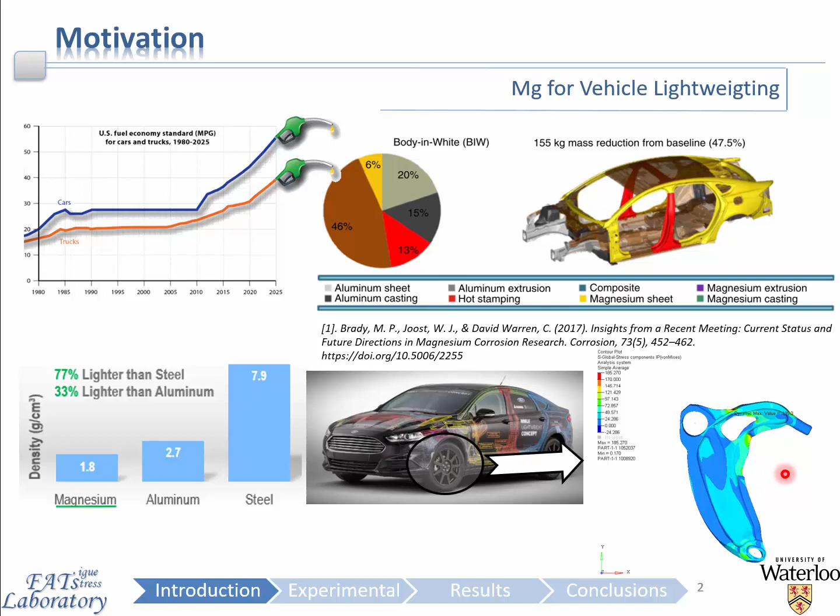So one might ask themselves, if the properties of forged magnesium are arguably superior, why hasn't this material been utilized for such components already? The answer has many facets, one of which is the poor formability of magnesium at room temperature.

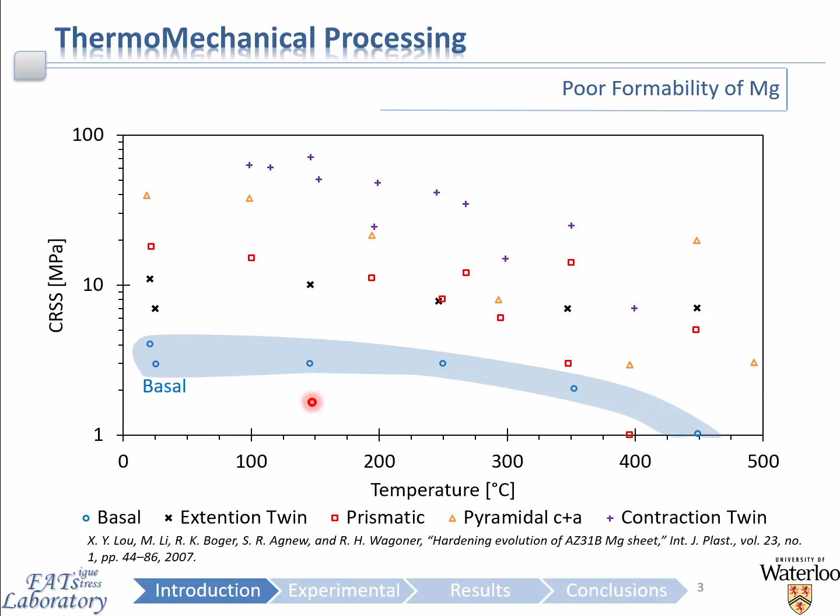If the grain orientation is not favorable to activate basal slip, then extension twinning will be active, in the range of 7 to 10 megapascals, followed by prismatic, pyramidal, and contraction twinning.

Von Mises' criterion states that for arbitrary plastic deformation, at least 5 independent slip systems need to be activated. At room temperature, this is very difficult with magnesium, as basal slip is typically what dominates.

However, at elevated temperatures in the range of 225 to 425 degrees Celsius, the critical resolved shear stress of the other modes decreases dramatically, improving the ability to plastically deform and thus the formability of the material. So to successfully process magnesium and achieve large strain via forging, it must be done at this elevated temperature regime.

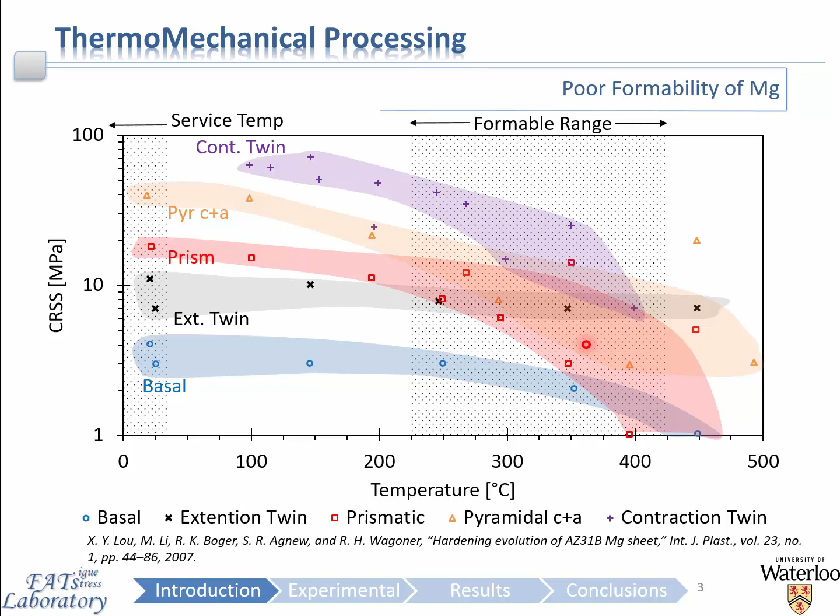This introduction of temperature into the processing equation complicates controlling the resulting microstructure quite a bit, as well as the fatigue behavior, as the process is now highly thermomechanical.

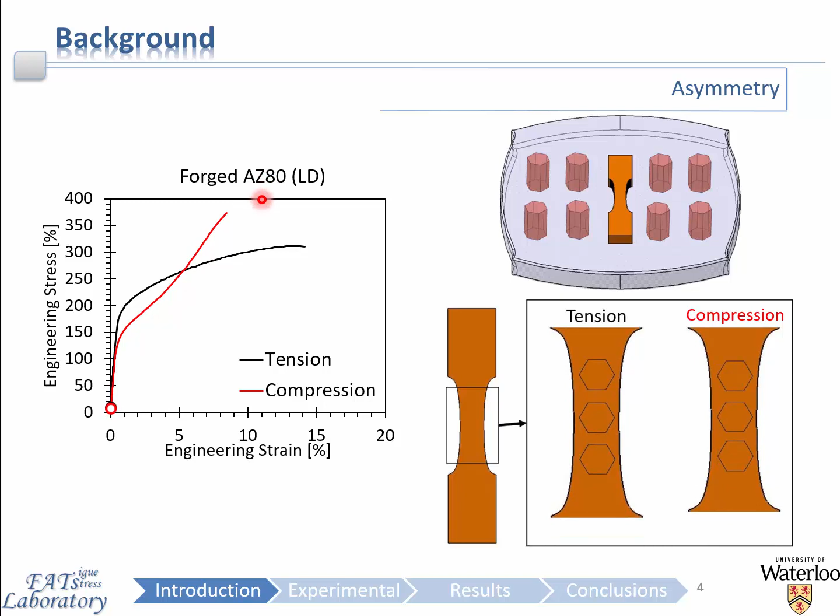Anisotropy is also another well-known phenomenon which is present in most wrought forms of magnesium alloy with sharp texture. In essence, it describes the dependence of the material properties on the direction relative to the crystallographic axes.

So important to note here is that the material behaves vastly different in monotonic tension depending on the direction which you are deforming it. So this anisotropic nature of magnesium will subsequently be discussed in more detail.

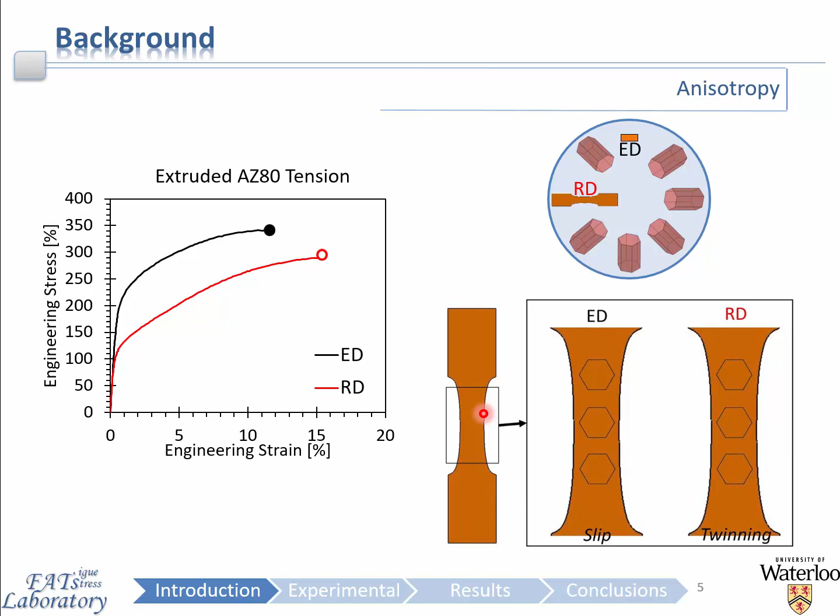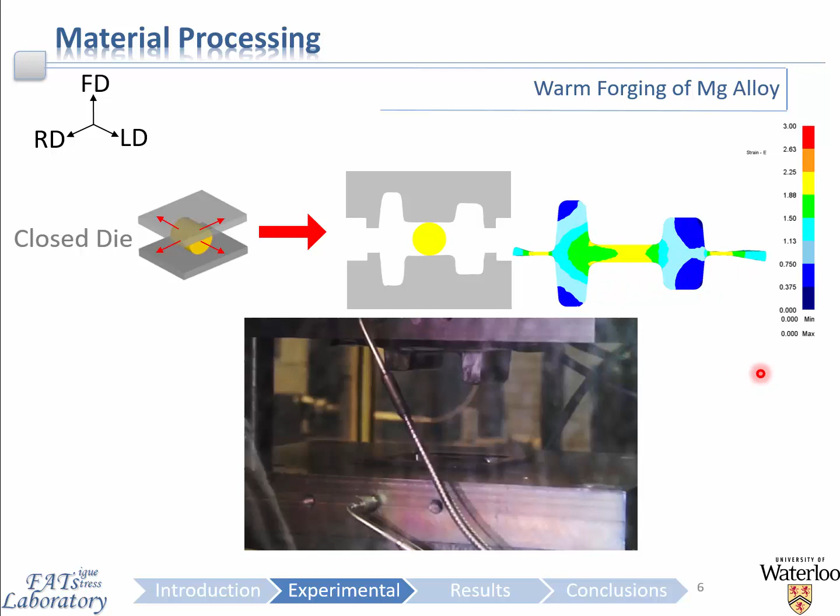The contour plot on the top right shows the evolution of strain throughout the cross-section of the forging, predicted through a finite element model. It can be observed that the billet undergoes the forging process from a circular cross-section to this I-beam profile. The details by which the experimental investigations to characterize both the structure and properties were conducted are as follows.

Biaxial fatigue tests were done over several frequencies ranging from 0.1 Hz to 30 Hz to maintain an approximately equivalent strain rate between all of the tests. Both the monotonic and fatigue tests were conducted using servohydraulic controlled load frames with digital image correlation used to measure the strain in the monotonic tests, and an extensometer used to measure the strain in the fatigue tests.

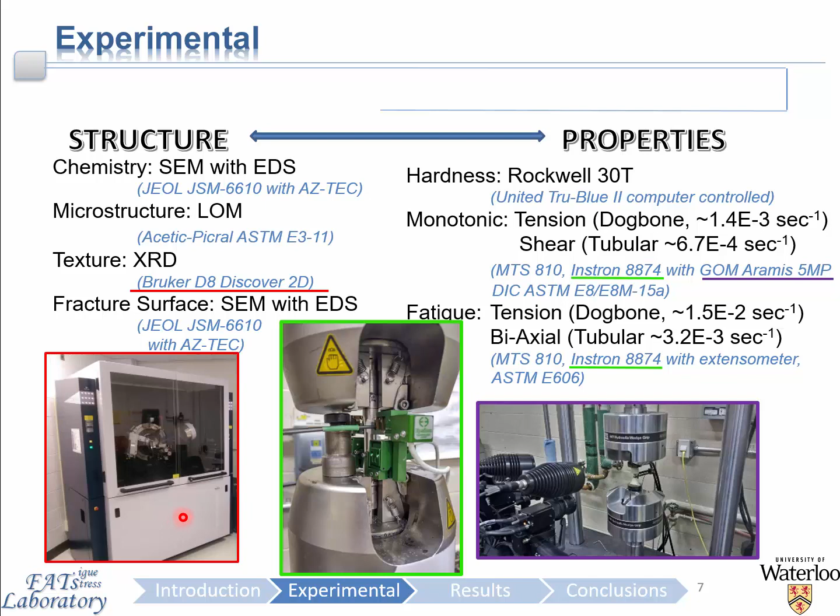The chemistry of the alloy was obtained via scanning electron microscopy with EDS for chemistry, the microstructure with light optical microscopy, and the texture with X-ray diffraction shown here. The fracture surfaces of the monotonic and fatigue samples were investigated using SEM as well. The superficial hardness was measured using a computer-controlled hardness tester with a Rockwell 30T scale.

As discussed previously, one key characteristic of magnesium is its comparatively low number of slip systems relative to other FCC or BCC metals. Due to this, there isn't a lot of options for the material to deform when subjected to a cyclic load. So this illuminates a large reason why we are interested in the biaxial fatigue of magnesium alloys in the first place, since these low number of slip systems effectively confine the plasticity to be very stress

and loading orientation specific. Non-proportional loading, which effectively rotates the principal axes, can cause irreversible plastic deformation and damage on planes which were otherwise unaffected or inaccessible by the limited number of deformation mechanisms that magnesium has available, as I previously discussed.

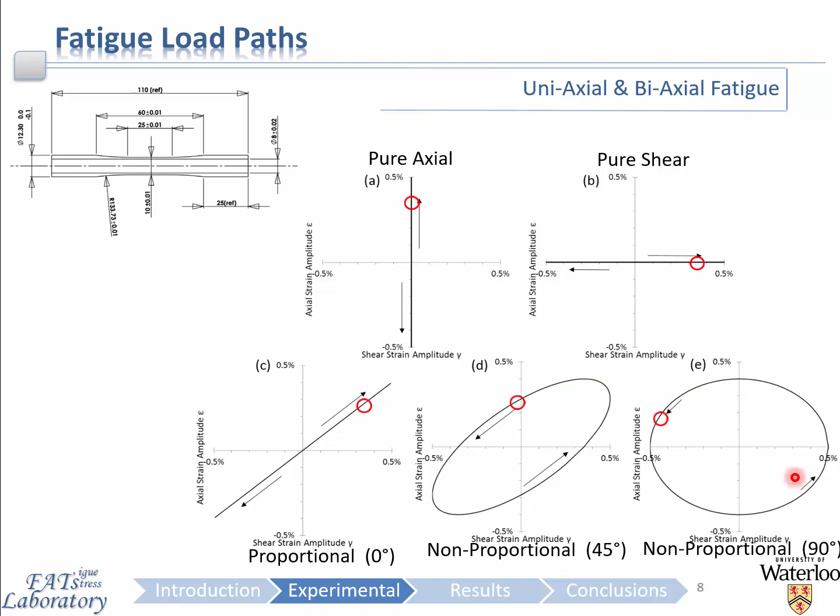The discussion regarding the crystal structure of magnesium and resulting asymmetry and anisotropy has hopefully highlighted to the audience that the cyclic behavior of magnesium alloys is highly dependent on the loading history, such that when the material is forged, the crystal structure reorients itself to have the C-axis aligned with the local forging direction of the material.

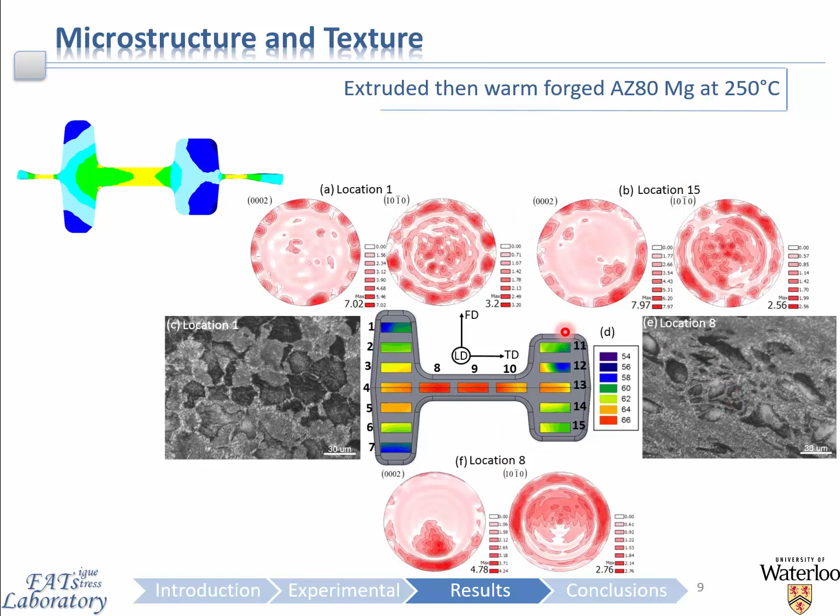Following warm forging, the microstructure is effectively frozen, preserving the texture. However, the warm temperature and slow cooling rate are enough to annihilate any residual twins which remain, meaning the microstructure observed in the forged material is virtually free of twins and has a local texture that varies throughout the cross-section of the forging, as illustrated here.

Now looking at the uniaxial fatigue results for a variety of different forging conditions, the base extruded material condition is illustrated here, as well as the forged material condition illustrated by the red lines.

It is well known that for wrought magnesium alloys, they typically display an asymmetric cyclic response, as can be observed by the hysteresis loops illustrated here and here. This is due to twinning in the compressive reversal, this downward reversal, which causes a lower peak stress observed in compression. This is followed by detwinning in the first part of the tensile or upward reversal, which is then exhausted and followed by hard pyramidal slip, resulting in a higher peak stress observed in tension.

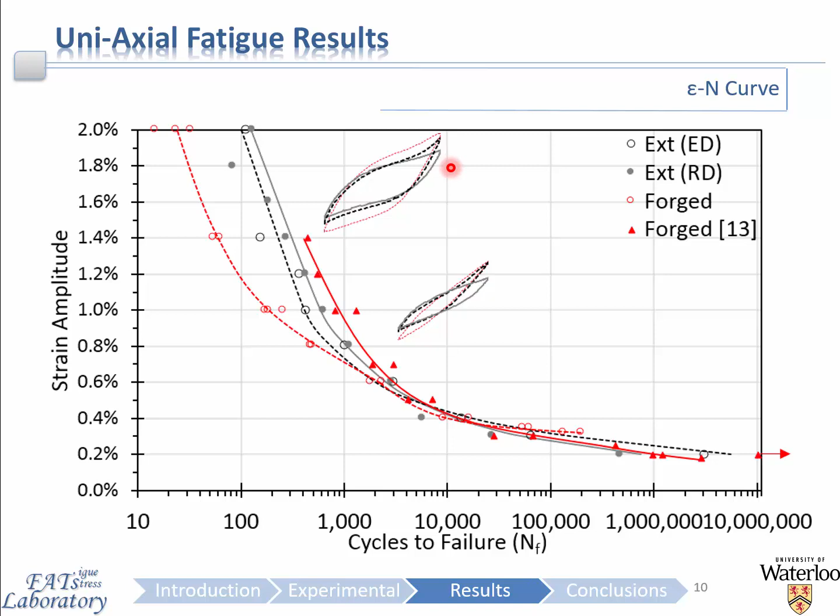The question now is, how does this asymmetric response affect the biaxial response of the material in fatigue?

Looking at the stabilized pure axial and pure shear cyclic response for a fully reversed axial strain amplitude of 1% on the left and 1% shear on the right, it can be observed that, similar to the previous slide, there is an apparent asymmetry of the axial response, whereas in shear it is virtually symmetric.

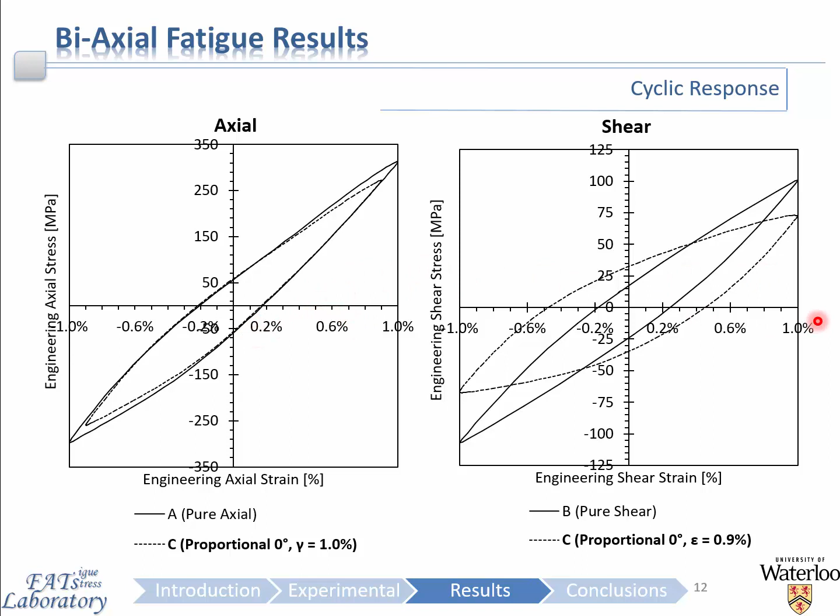Now adding the biaxial proportional loading, shown as dashed lines, it can be observed that the axial response is virtually identical, whereas the presence of the axial strain has dramatically lowered the shear stresses in both directions, the peaks, as shown in the figure on the right here.

Now, if we look at non-proportional loading at 45 degrees, it can also be observed that the axial response is still virtually identical to the previous cases, being the uniaxial and proportional biaxial. The shear strain in this case was controlled to be at a lower strain level of 0.5%, as seen in the figure right here.

The reason for this is that this particular loading history is representative of the service loads for the actual component that we discussed in the motivation part of this presentation.

Despite this, you can still observe that the shear response remains symmetric, and the peak and valley of this hysteresis loop has become very blunted due to the presence of this axial response on the left.

The modification to the cyclic behavior is a direct result of the presence of the axial loading dominating the cyclic behavior, and this is an important concept that will form the basis for the modeling of the fatigue behavior, which I will discuss in a few slides.

Finally, when we increase this non-proportionality to be out of phase by 90 degrees, we can observe that once again the axial response remains virtually identical to all previous cases, whereas the shear response has once again been affected by the increase in this non-proportionality.

Important to note is that the plastic strain energy density for the shear response, signified by the area enveloped in these hysteresis loops, has decreased with increasing phase angle, and this is an important observation which I will discuss later.

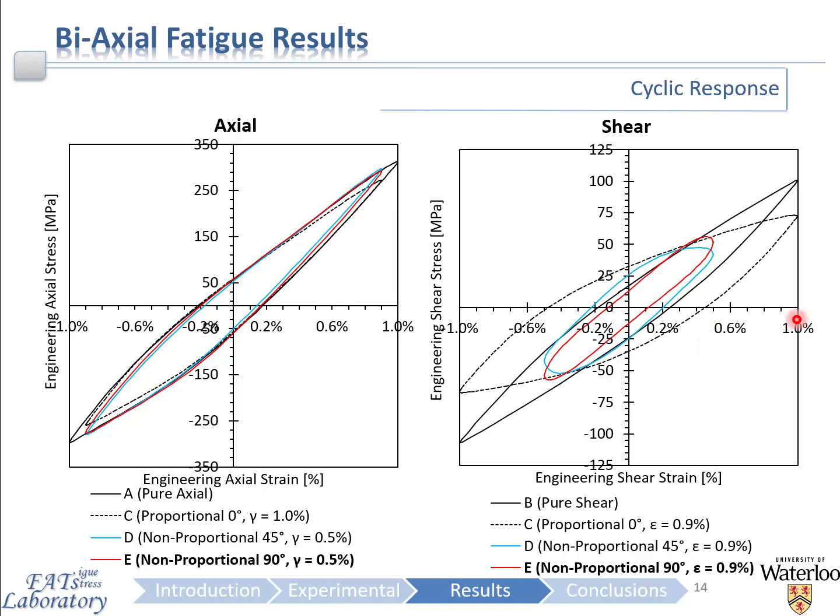Now, to summarize the strain life curves for each of these cases, this slide illustrates the pure axial behavior, with strain amplitude on the y-axis versus number of cycles to failure on the x-axis. Here is the pure shear behavior with the von Mises equivalent strain amplitude graphed on the y-axis. It can be observed that in the high cycle regime, the behavior between pure axial and pure shear is virtually identical.

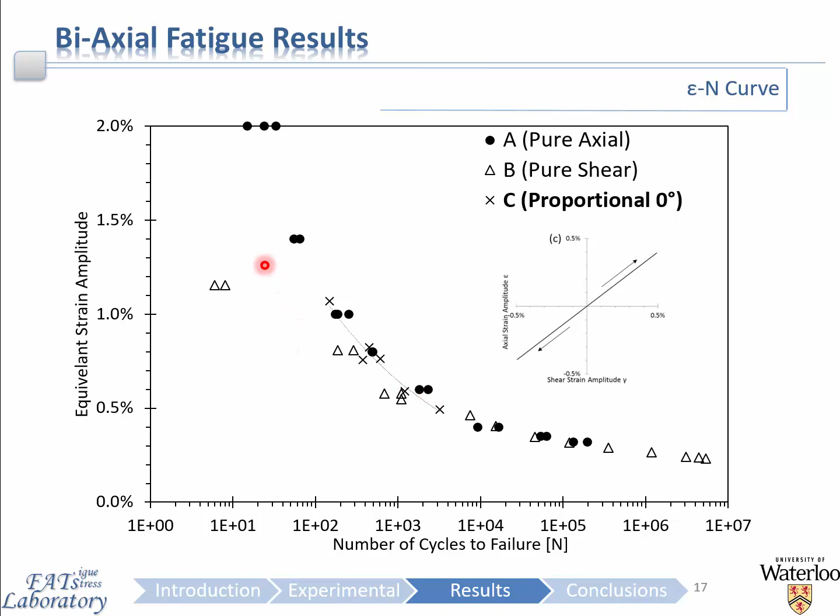Now, adding the proportional biaxial cases, it can be seen that they behave somewhat as one would expect, as an average of the axial and shear responses, somewhat in between these two curves. Since there is no rotation of the principal axis here, the damage is accumulating along the same planes that were accessible in each of the uniaxial cases.

However, what's quite interesting is when we look at the non-proportional data, a dramatic shift in the behavior can be observed, such that for a given strain amplitude, a lower number of lives is observed.

As can be seen by these blue data points shown here, this is typical of ductile materials that observe a degradation in fatigue life as a result of non-proportionality effect. This material is ductile, as it has a 20% failure elongation, so this is fairly typical in line with what other researchers would find.

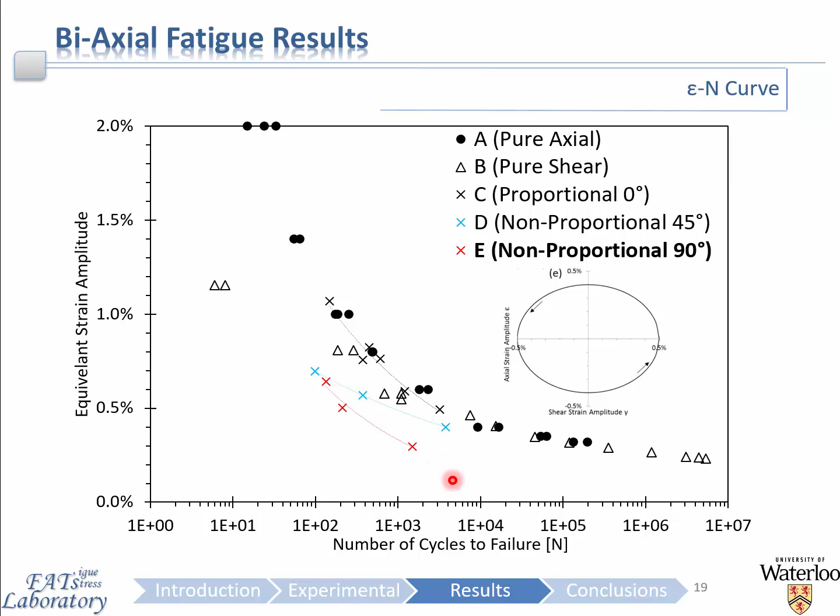The damage is now accumulating along different planes, resulting from the rotation of the principal axis, and this results in a detrimental effect on fatigue. This effect is now even more exaggerated in the 90-degree out-of-phase case, where the increase in non-proportionality further decreases the fatigue performance. Now, there are a large number of damage parameters available for modeling fatigue.

Of those, a smaller subset exists which work well for materials with asymmetric and anisotropic behavior. Using energy as the basis for a damage parameter is a robust method for magnesium alloys, since it's a scalar quantity that is invariant of direction, so it's quite convenient too.

The model is quite simple in the fact that the life prediction is just a weighted average of the axial and shear fatigue life predictions that were calibrated from the energy life curves for each of the uniaxial cases. This individual weighting factor of 0.3 places more emphasis on the axial energies being more damaging, as it's kind of artificially penalizing the shear direction, since the axial direction dominates the biaxial response, as well as the crack orientation, which I'll discuss in the subsequent slide.

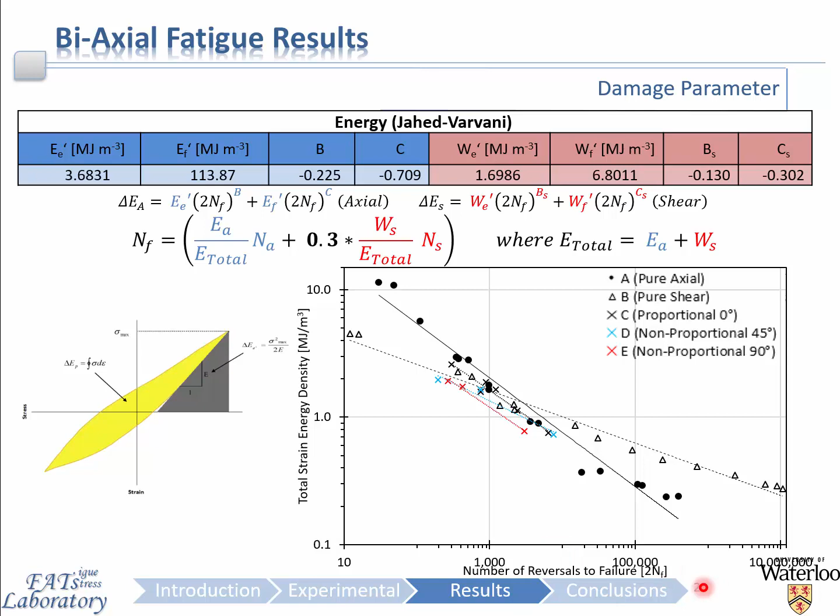You can see in the image on the right here the total strain energy density versus number of cycles for all of the 5 loading paths that were observed here.

Now looking at the fatigue life prediction for all of the 5 loading paths, it can be observed that virtually all of the fatigue life predictions are within a band of plus or minus 2, which can be considered a very good and reliable prediction. The non-proportional cases are trending towards non-conservative, which is a focus of future work in refining this damage model.

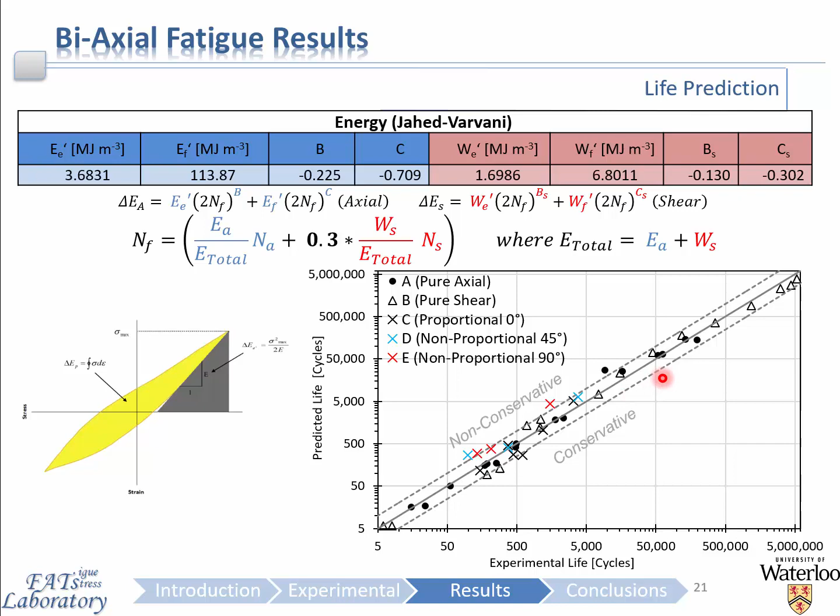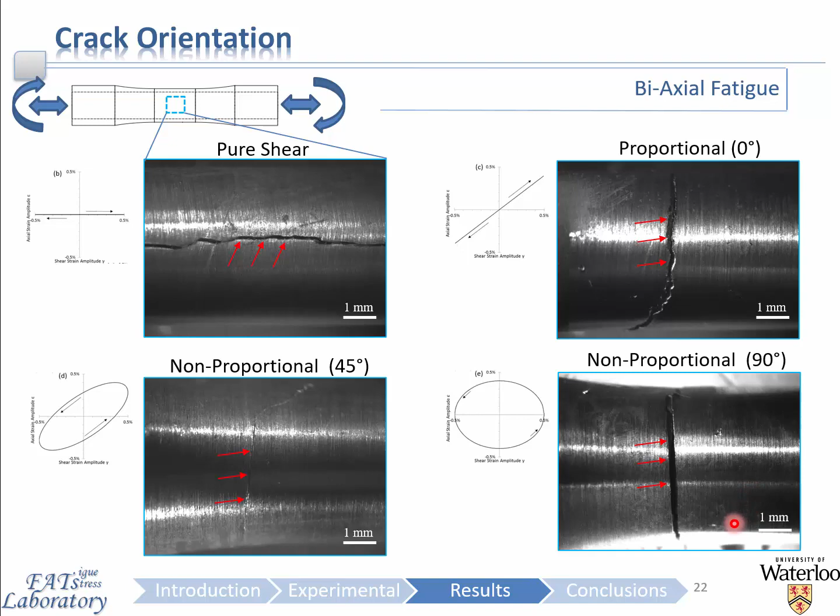In conclusion, near net shape closed-die warm forging of extruded AZ80 magnesium results in a structure that yields both good strength and ductility for automotive suspension applications.

Some concluding remarks: due to the limited number of slip systems available at room temperature, the cyclic response of magnesium is quite complex, as illustrated in the presentation. The rotation of the principal axis in non-proportional loading causes damage to accumulate along different planes and a lower life, which is typical of a ductile material.

Strain energy density is a good damage parameter for magnesium because it's a scalar quantity that is invariant of material direction. This was demonstrated to be quite robust and convenient with asymmetric and anisotropic materials such as the forged magnesium we have investigated here.

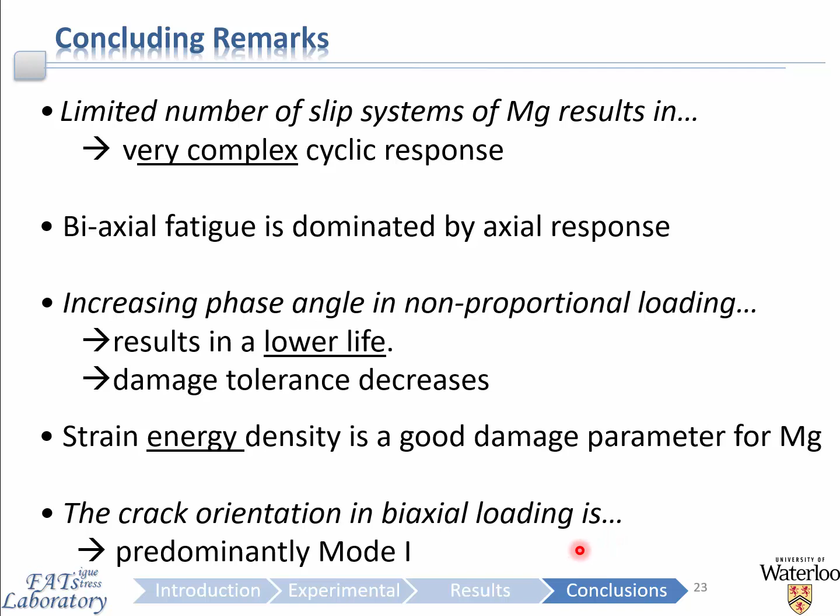Finally, the crack orientation in biaxial loading is dominated by a mode 1 crack that is perpendicular to the loading axis and does not resemble the crack observed in the pure shear case.